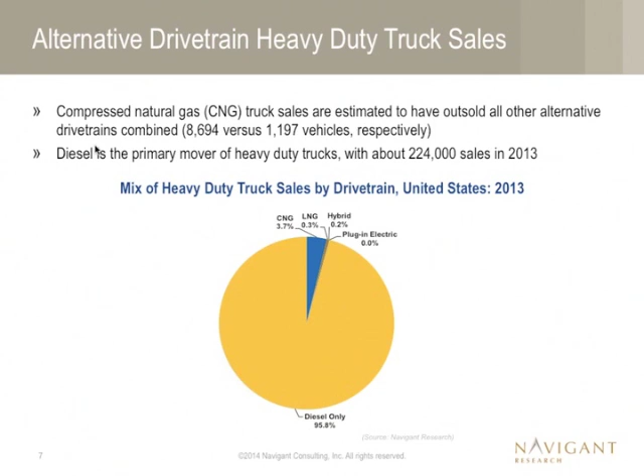But we are seeing a lot of movement within the alternative drivetrains as well. CNG remains the big segment, and we anticipate that tripling by 2022, growing to almost 27,000 annual sales in the heavy duty market. Liquefied natural gas also has challenges but is seeing strong growth, anticipated to hit 7,163. Hybrids and plug-in trucks are expected to grow rapidly but remain a very small part of the market.

In the last couple of years, natural gas has really stolen the thunder from the hybrid market. Hybrids grew rapidly a couple years ago and then stalled, and we see that still somewhat the case within heavy duty. There, compressed natural gas and liquid natural gas are becoming more the mainstay, but we will still see a number of hybrids and plug-ins.

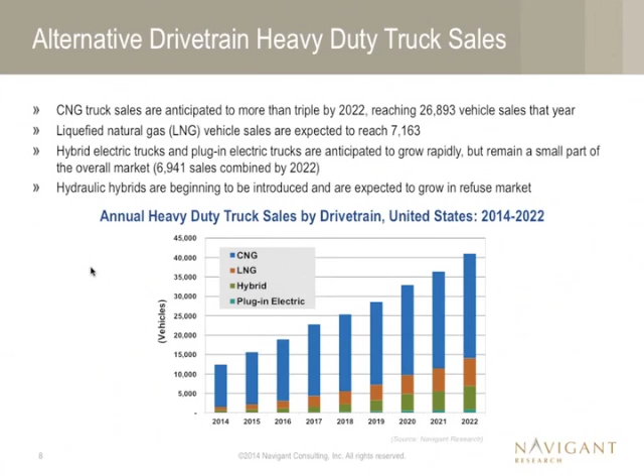Finally, what isn't in this chart is hydraulic hybrids, and I wanted to mention that because we're seeing a lot of interest in the refuse market as well as the transit market. In refuse, about 17 hydraulic hybrids were added in 2013, and 2 of those were actually CNG and hydraulic hybrid combinations. We're seeing a lot of interest in understanding how CNG can be combined with other technologies, and hydraulic hybrids may be one area that drives combining those technologies.

So trying to understand why natural gas has taken the spotlight, one of the big issues comes back to cost. Looking at the cost of gasoline and diesel based on historic prices, we go back to oil prices and look at the ratio of oil prices to refining and the price changes we've seen. We're anticipating that prices for gasoline and diesel are going to increase by about 3%.

Now CNG prices, there's a couple of things that make this a little bit complicated. First, as we're hearing right now, natural gas prices, the Henry Hub spot prices for natural gas, are actually very high. We have not seen that translated into the CNG price, and one of the reasons is because natural gas does not make up the majority of the cost of CNG. The cost of CNG is being driven by electricity costs, taxes, and profits, those sorts of things. About 30% of your CNG price is related to natural gas.

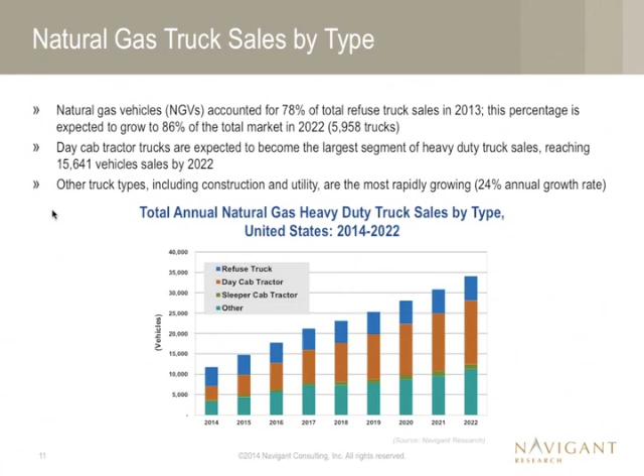In terms of our forecast for natural gas, one key issue to look at is the infrastructure side of things. Within the refuse market, it varies quite a bit whether it's a private station dedicated to an individual refuse fleet or if they're using public infrastructure. It can vary depending on the size of the market and the specific layout of the routes. If there's a contract for a certain number of trucks to service a city, the individual refuse companies assess whether it's worthwhile to install a private refueling station. Some use mobile refueling, or they just end up using public refueling to serve that market. So where does this leave us?

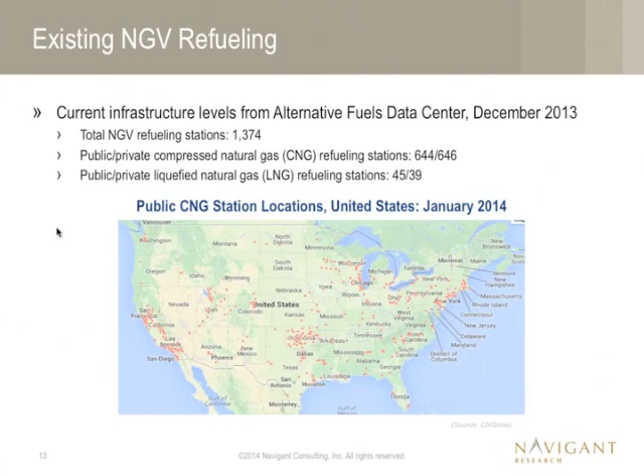So just a couple summary slides here. The cost of the natural gas station remains a big hurdle, but we're seeing efforts to change that.

LNG is also still high, particularly for the kind of small scale that it is, so we've seen slower rollout of infrastructure for that. And finally, there's a lot of merger and acquisition activity within the natural gas industry still. While refuse may be somewhat shielded from that, there are still big questions on how overall that is going to impact the industry.

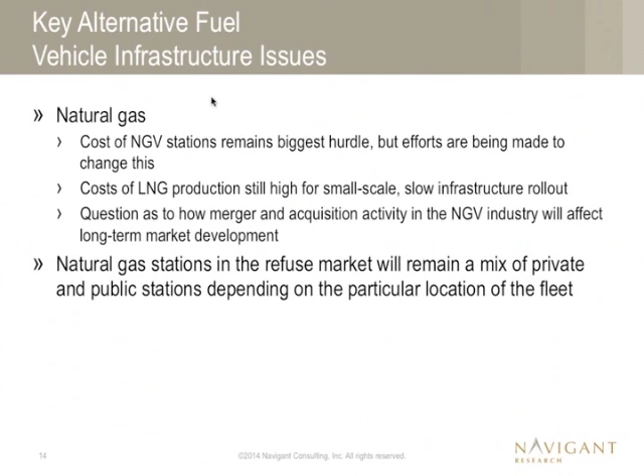And then the refuse market, as I mentioned before, is going to remain a mix of private and public stations. It's really going to depend on the location of a particular fleet.

One of the keys right now that we're seeing within the natural gas market overall is that smaller fleets are becoming a much more important factor for growing the sector overall. So while the focus early on has been to get to the bigger fleets of 100 to thousands of trucks, now we're seeing an increased focus on the smaller fleets of 5 to 50 trucks.

Specific vocations are really driving this, whether it's vocational trucks like refuse, construction, utilities, cargo, transit, logistics - those sorts of things are becoming increasingly important.

Return-to-base fleets have traditionally been the key bread and butter for natural gas, but we are seeing longer distance, point-to-point routes becoming increasingly important. That matters because you're seeing infrastructure develop to support that.

So you are starting to see more truck stops on the freeways and those sorts of things that are increasingly serving either the compressed natural gas or the LNG.

And beyond that, the market for natural gas vehicles really remains fleet focused. We think that's going to remain the case. We don't see a big consumer market.

And then finally, the key to all of this really is that price differential between gasoline and diesel and the alternative fuel.

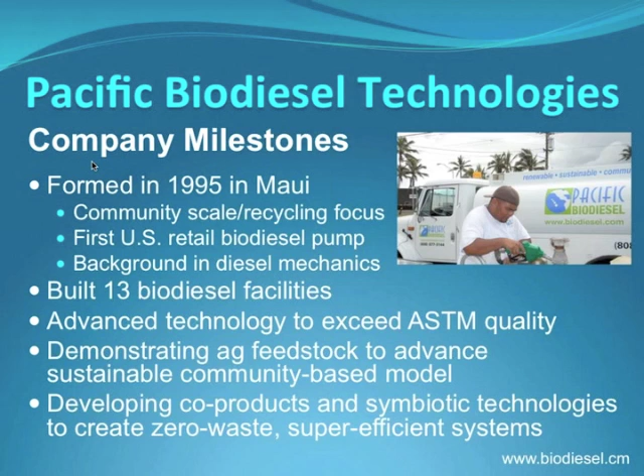So, but really, why are a lot of the folks here concerned with refuse fleets and community fleets, and why are you in this conversation? I think the reason is that as a world, we're trying to deal with greenhouse gas emissions. We're trying to talk about local emissions in cities, as far as smog and health issues, as well as this problem of importation of petroleum, which exports our cash. Significant issues around the whole economic model.

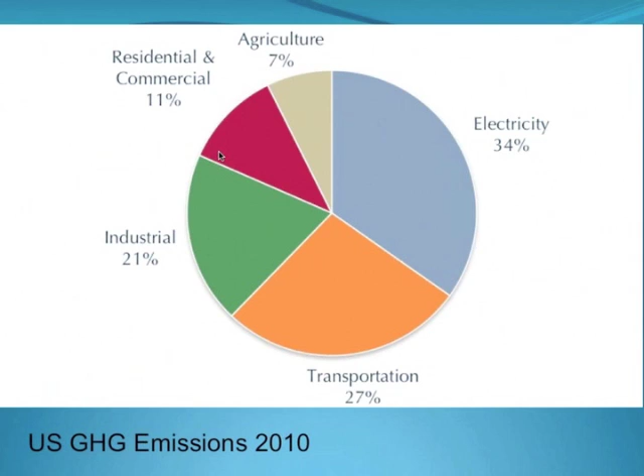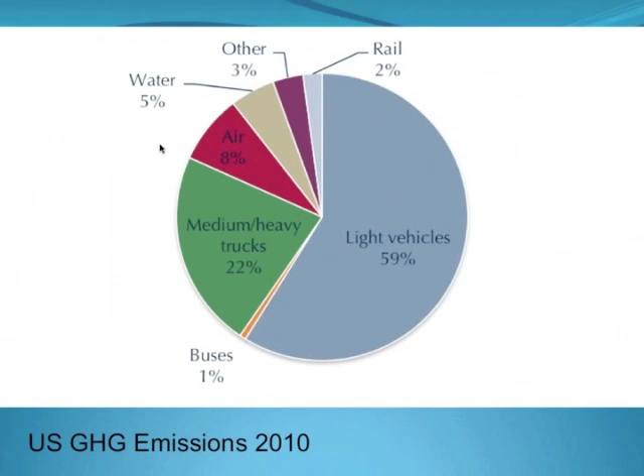So transportation is a piece of it, and it's a big piece. When you look at the total amount of greenhouse gas emissions, this is from 2010, transportation was a significant chunk of that, at 27%. And of that 27%, this is how it splits out with vehicles. Light vehicles, mostly gasoline engines, were 59%, but the next largest opportunity is medium and heavy duty trucks, at 22% of total transportation greenhouse gas emissions.

So what we're doing is making an alternative fuel for diesel engines, which is biodiesel, and I'll briefly go over what it is. Most everybody's heard of it by now, but it's a fuel for any diesel engine. We've changed the vegetable oil to fit the engine, so you don't have to fit the engines to the vegetable oil. It's non-toxic, biodegradable, non-flammable, ultra low sulfur, always was. In our case, it's recycled, but if you make it out of crops, it's still renewable—a little different from CNG, where, thank goodness, it's domestic, but it's not renewable, it's still a fossil fuel. It's excellent lubrication for engines, and we've got some good standards.

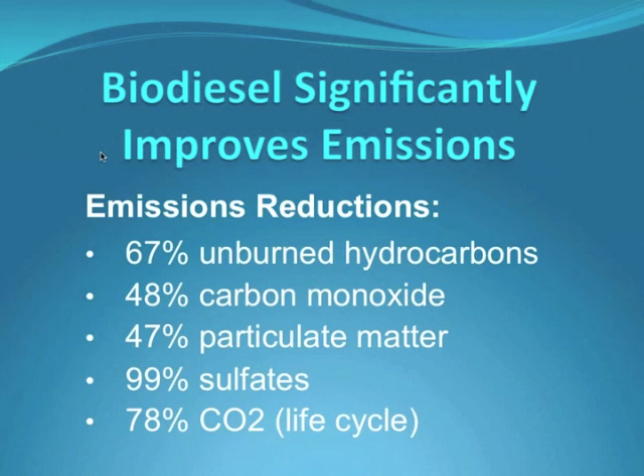But there's a lot of other values to biodiesel. Again, where petroleum is a foreign source, biodiesel is local, or can be and should be local to the U.S. Petroleum is toxic as a liquid, meaning if you spill it on the ground or in the water while fueling, you've got a problem. Biodiesel is non-toxic, so it rapidly degrades. With a ground contaminant of petroleum, you've got to dig it up. With biodiesel, it's biodegradable per EPA rules, so you need to keep it from running off your property, but you're not required to clean it up if you spill some—it will naturally degrade.

Some people like biodiesel because it's non-flammable. It's combustible, but not flammable, which is interesting when you're trying to run an engine, but the flash point is very high—I always claim you can put out a fire with biodiesel instead of starting one. And the price of petroleum, as we all know, fluctuates, whereas biodiesel can be very stable.

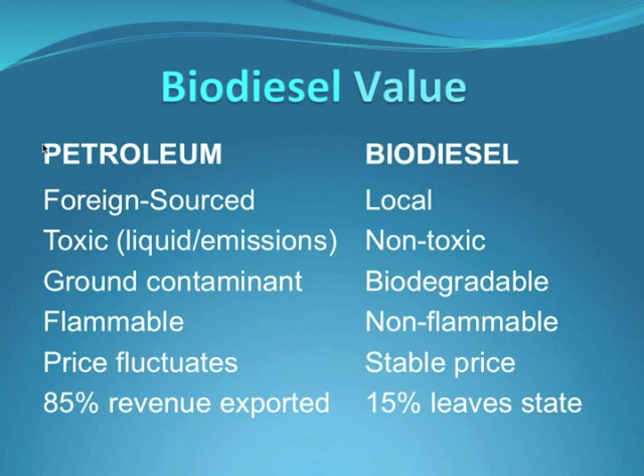As I talked about with the money, this is a big one for most communities, and certainly in Hawaii we look at this a lot. 85% of the revenue, or 85 cents out of every dollar you spend on petroleum, is exported out of your area, usually out of the country, in the case of liquid petroleum. With biodiesel, only about 15%, or 15 cents out of every dollar you spend, leaves your community, assuming you're making your biodiesel locally in the sustainable model.

So again, there's lots of benefits for the community that fleet owners can cause to happen by running with biodiesel. It's a cleaner environment. You can get jobs and businesses into your community, which will build energy security because it's a very diversified source of energy. In the case of agriculture, it brings in diversified agriculture, gives farmers options on what they can grow and where they can make their money.

So I talked about the different plants we've built over the years. We built plants all across the U.S., from Alaska to Texas, Maryland and Pennsylvania to California and Oregon, and one in Japan. But this is the latest state of the art right here—this is actually where I'm at today, the Big Island biodiesel plant.

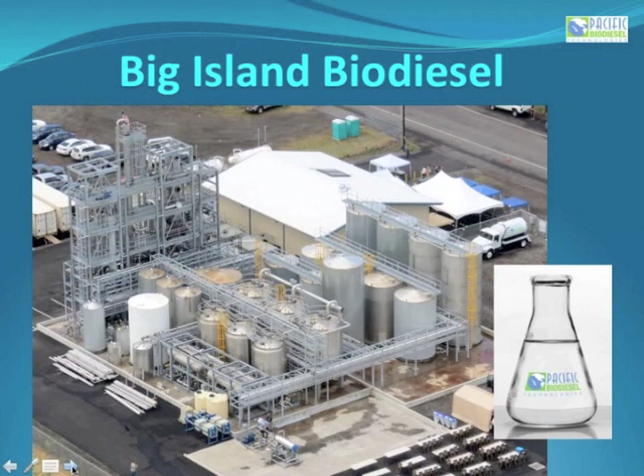This is what we need to do to run those trap greases. So we take the worst material that we have to deal with—a lot of the refuse fleets know how FOG is a difficult thing to deal with—and we make it into the best fuel. This fuel from the Big Island plant is among the highest quality biodiesel in the world, again using that trap grease as a feedstock.

So we run a laboratory analysis of this fuel, and it's spectacular.

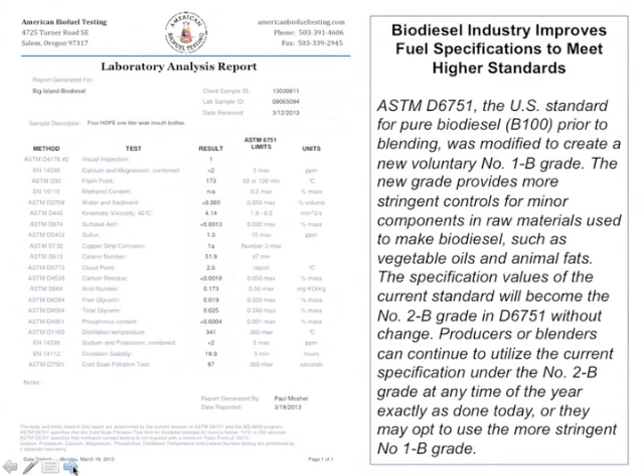The reason we need to do this is that the engines are changing, and as the engines change, the OEMs have said what we'd really like in biodiesel is this. So you can see these are the modifications to the ASTM D6751 spec. The first one came out in 2002, and if some of you remember, we started in 1995, so we didn't even have a specification for the product we were making when we started in business. But thank goodness we've got a spec now, and as engine technologies have changed and we've learned more about the fuel, we've continued to modify this spec.

If you think of the engines back in the 80s not being like the engines today, it's the same for biodiesel—the biodiesel we made back in '95 and '96 is not the same as the biodiesel we make today. The product is getting much better, much more stable. We're pulling out more impurities, and so some of those early issues we dealt with are just non-existent today because of the fuel quality.

And what that's done is, because of the increase in fuel quality and also the comfort of the engine manufacturers, a lot of them are getting more and more supportive of biodiesel.

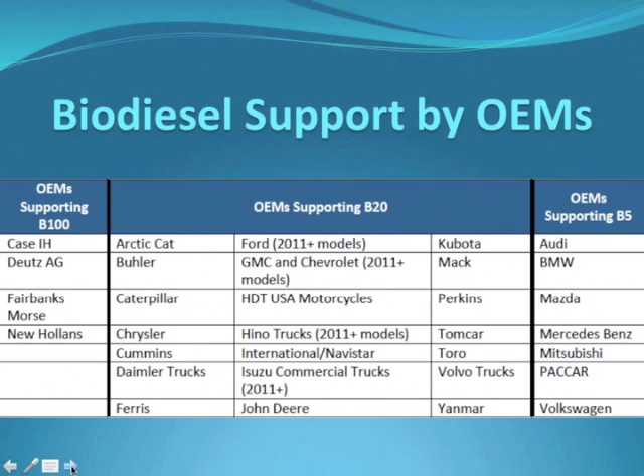A lot of this support really comes down to what technology they're putting in their engine, as well as how much testing they'd like to do to prove their engines are meeting emission regulations. Some manufacturers are comfortable with the product but aren't willing to spend the money to certify engines on B20 or B100, so by rule they have to say they don't support it, because otherwise they'd have to do the emission testing on it. Just an unfortunate way—the EPA requires manufacturers to do emission testing.

One of the issues we've looked at with the latest technology engines is the DPFs, diesel particulate filters, and SCR systems coming out on the newest engines. These use diesel exhaust fluid, and it turns out they run really nice on B20. NREL has checked these systems, and the performance and durability were not affected by the use of biodiesel. What we've seen in the field is that the SCR engines are much more robust than the generation before, so they're running really strong and applicable to biodiesel.

Again, they need very clean fuel, and that's why we want the distilled fuel. As the quality demands get higher and higher, we're going to be there with the right fuel.

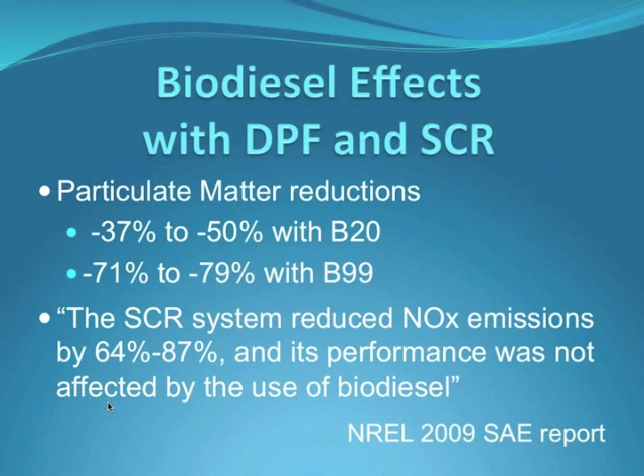One of the things that happens with manufacturers, or dealers especially, is that they tell you if you use biodiesel in the engine, the warranty is void. As I said, a lot of this comes back to emission testing, not the actual durability of the engine. So when it really comes down to it, you have to look at what they can really say about the warranty.

Here's the biodiesel handling and use guide from NREL, from the Department of Energy. In this guide, it has a statement in Chapter 6 that says federal law prohibits the voiding of a warranty just because biodiesel is used. It has to be the cause of the failure. So what it comes down to is if you're using good quality fuel and taking care of your system, you won't have a problem with biodiesel, and they cannot void the warranty on the engine because of this.

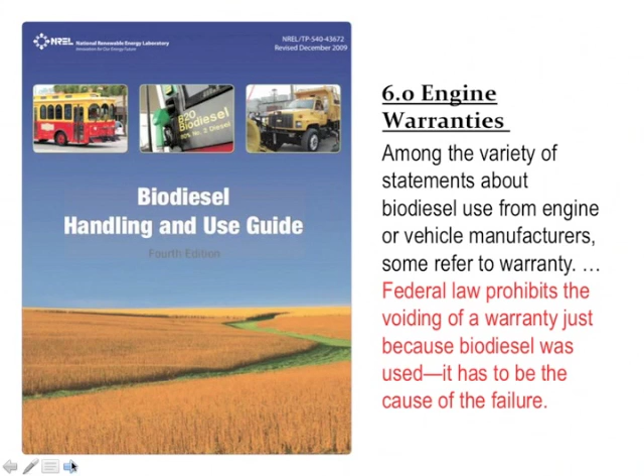They can't void it unless they prove that biodiesel causes the problem. Being a diesel mechanic, I'm always looking for what actually was caused by biodiesel, and I'm very comfortable with all the new technology engines. I'd like to go through some of those with you here too.

We also run large diesel engines for Maui Electric. We run the Arizona Memorial shuttle boats on B20, and there are stations all around the island that do more retail.

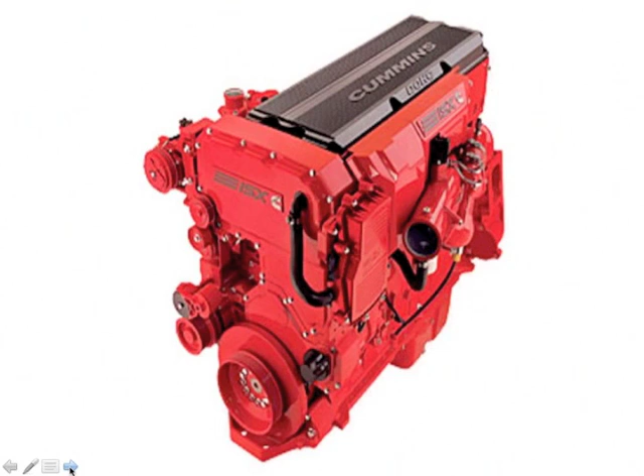And for the heavy duty engines, this is the ISX Cummins. Our company alone has probably half a dozen of the 2011 and 2012 vintage ISX running on 100% biodiesel, and many other fleets are running this engine at the B20 level. No problems, it runs fine. We've actually got engines covered by PacLease, bumper-to-bumper warranty, where B100 is acceptable - they don't have an issue.

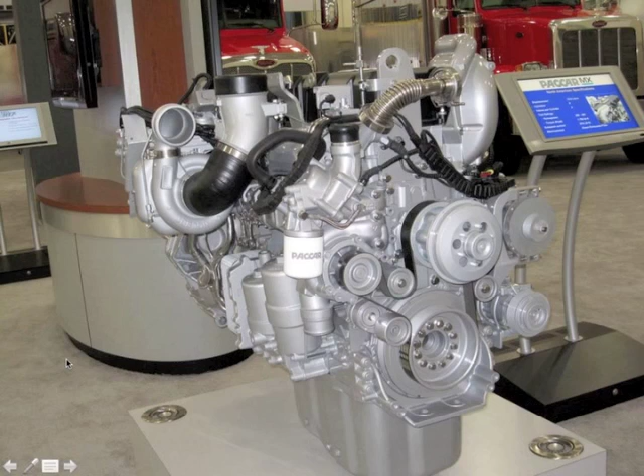And this is the PACCAR MX. Again, we've got these running on 100% biodiesel, and we're actually doing a test right now for PACCAR - an extended service test on the 2012 at B20. There's nothing to do except fill them up. We haven't had any issue with any hose, seal, anything to do with this engine, and they're very efficient engines right now.

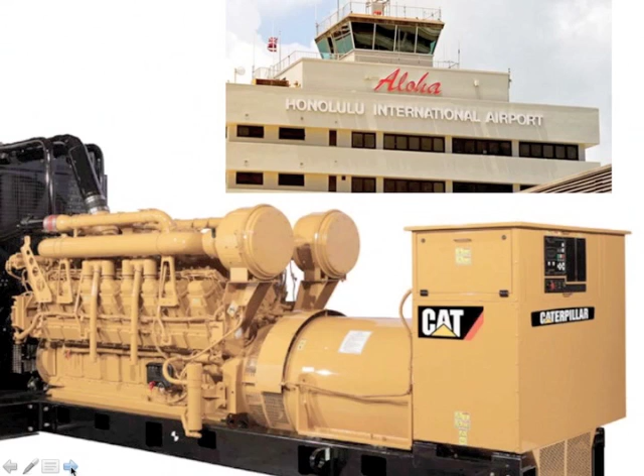Here's a Caterpillar that's going into the Honolulu airport as prime power and backup. There's 4 of these new engines, and Caterpillar is going to warranty them all on B100, and that's the only fuel that's going to run in these generators is 100% biodiesel, and we have the contract to supply the fuel for this.

Boats as well, 100%. Again, I say 100% for a lot of these, but it's just as easy to run 20% or 5%. But it's all good. We're having good success along a wide variety of engines.

And I want to finish up by talking for a few minutes about the Sustainable Biodiesel Alliance. We saw early on in the industry that there could be some issues with biodiesel as well by not making it correctly.

This was formed by different entities, us and Willie Nelson, his wife, Woody Harrelson and his wife, Daryl Hannah, a few other people, and just looking at how to do biodiesel to maximize the really nice gains that you can get from this biodiesel product.